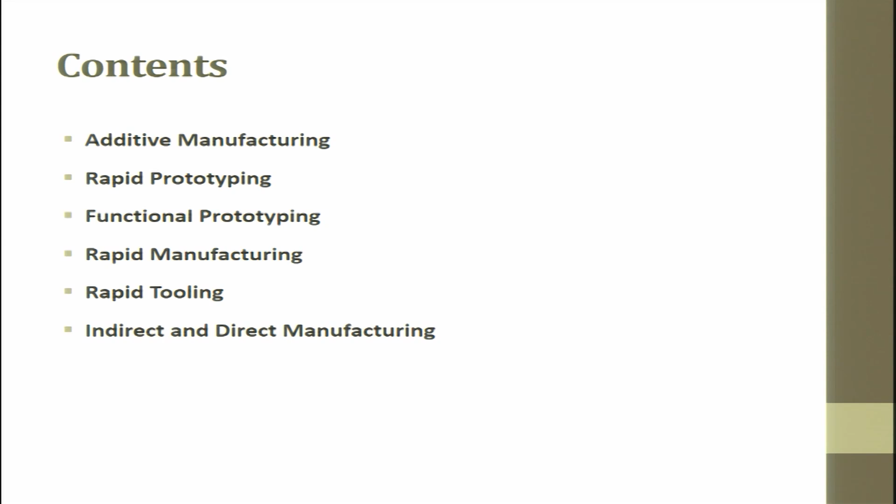Okay, so in this lecture 1, we will try to see additive manufacturing, we will see rapid prototyping, then we will see functional prototyping, then we will see rapid manufacturing, then rapid tooling, and finally direct and indirect manufacturing.

When we talk about rapid manufacturing, the industrial 3D printer is at the tipping point about to go mainstream in a big way. Earlier, additive manufacturing was thought of only from the prototyping point of view. Today, the power source and raw materials we use are moving towards real time requirements, which was earlier thought about in plastic, now changed into metal. Earlier we used to make only polymer based prototyping, today we are making metal based prototyping. The moment we make a prototype, we are now pushing it a bit more to a live requirement itself. So that is why industrial 3D printing is at the tipping point about to go mainstream in a big way.

Most executives and many engineers do not realize it, but this technology has moved well beyond prototyping, rapid tooling and toys. Rapid manufacturing is creating durable and safe products for sale to real customers in moderate to large quantities. This is where the terminology mass customization I talked about is getting integrated. This moderate can be 1, 2, 10, 200, 500, whatever it is, in moderate to large quantities.

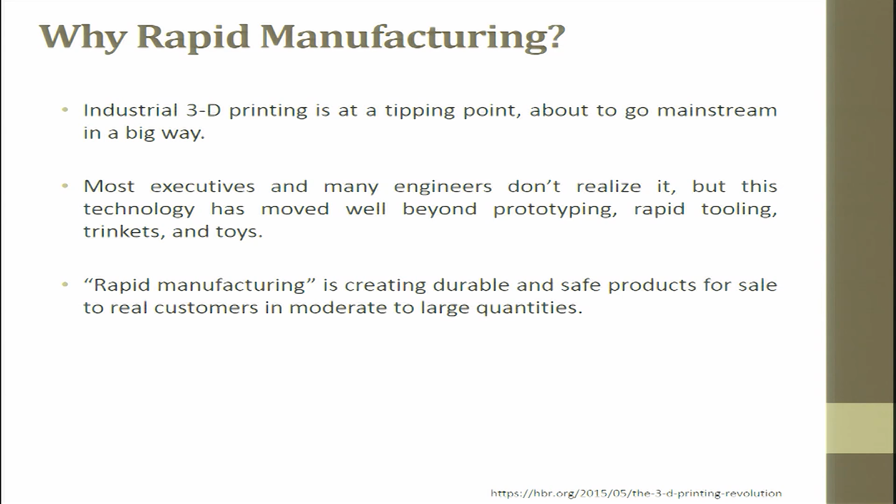Today, the major challenge is shrinking product manufacturing time. Earlier, we used to talk about, okay, if a big giant company decides to make a car, they say we will come out with a new car in the next 5 years, or the next 10 years. But today it has come down to next 6 months we will come out with a new car. So what has happened? The product life cycle time has shrunk down. The manufacturing time has shrunk down drastically.

The assembly line processes revolutionized production and dropped the assembly time for a single vehicle from 12 hours to just a few minutes. Today we talk about product delivery in minutes. We talk about pizza getting delivered at our residence in 30 minutes. So look at the amount of readiness which this product has in the stores. Here the product is all in a semi cooked state or a very raw state. Then it is all getting assembled, passed through an assembly line, which in terms of pizza is a furnace. So it is passed through the oven, and then after 10 minutes or 20 minutes or 3 minutes you get a pizza, right.

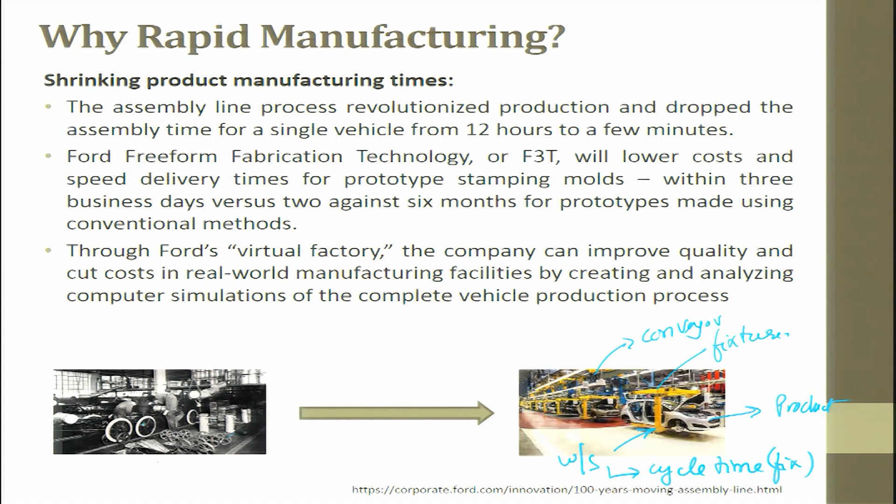So the product moves, and since it is an assembly line and continuously moving, the assembly happening at the workstation, the cycle time is also fixed. The product is produced, the conveyor belt is moving, and this is a fixture to hold it. Earlier the vehicle was moving where man was involved, and the cycle time was large, but now it has shrunk down drastically.

A US hearing aid company converted to 100% 3D printing in less than 500 days. So today hearing aids are made by rapid manufacturing. Today many products made for human-centric or human-friendly use are all done digitally. For example, they are first scanned for the requirement, converted into digital form, and the product is made such that it can get adhered and fixed in the required space.

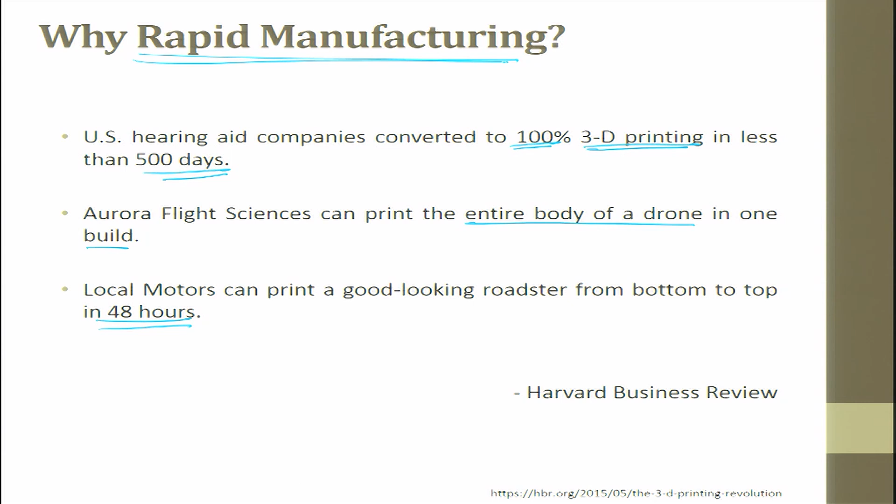Aurora Flight Sciences can print the entire body of your drone in one build. Today people have also realized that if you want to make a 3D product, it is good to start by making a 2D one, which can very quickly be cut through laser or any engraving tool. You cut it, then break the 2D pieces and assemble them to get the 3D part. So Aurora Flight Sciences can print the entire body of a drone in one build, and Local Motors can print a good looking roadster from bottom to top in 48 hours. These are some of the products made under rapid manufacturing.

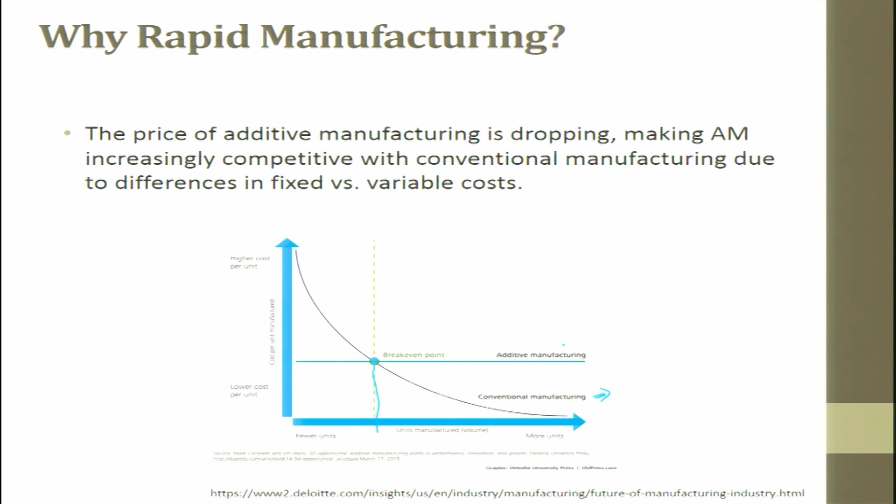This shows higher cost, lower cost, the cost per unit of manufacturing, and here it shows unit manufacturing in terms of volume. Of course, when more volumes are there, conventional is the best method of making it, especially sheet metal or metal forming operations - nothing can be more economical than that. But if the quantities are little, you can't use the same metal forming techniques, because the die cost is pretty expensive. So this is the breakeven point which talks about additive manufacturing versus conventional cost in terms of units.

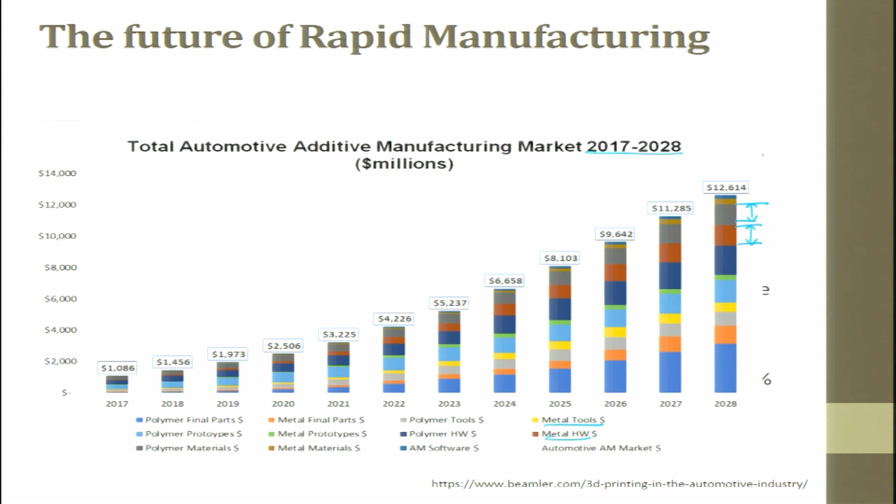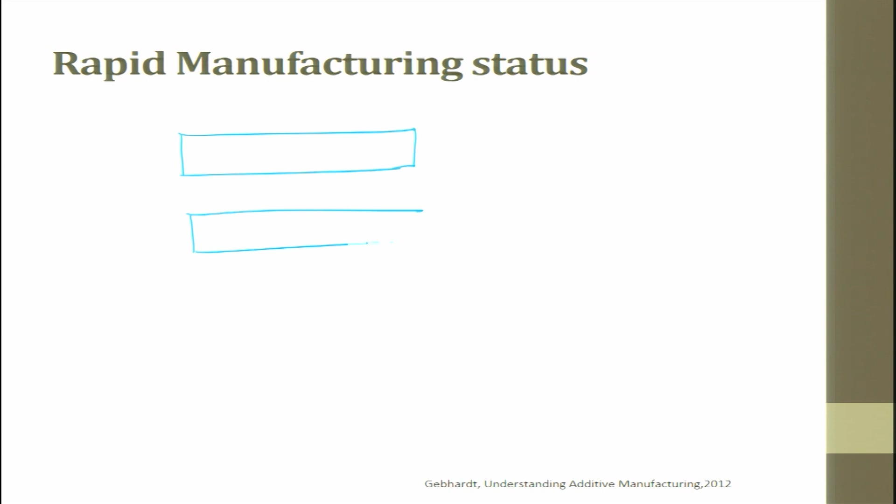Let us see the rapid manufacturing status. I would like to draw block diagrams. This is additive manufacturing, this is rapid prototyping, and this is rapid manufacturing. This in turn leads to solid imaging and concept modeling, and the next one is functional prototype - we will see what functional prototype is a little later. I am just giving you an overview of how it goes about. We have prototyping tools, then we have direct tools, and we have direct manufacturing.

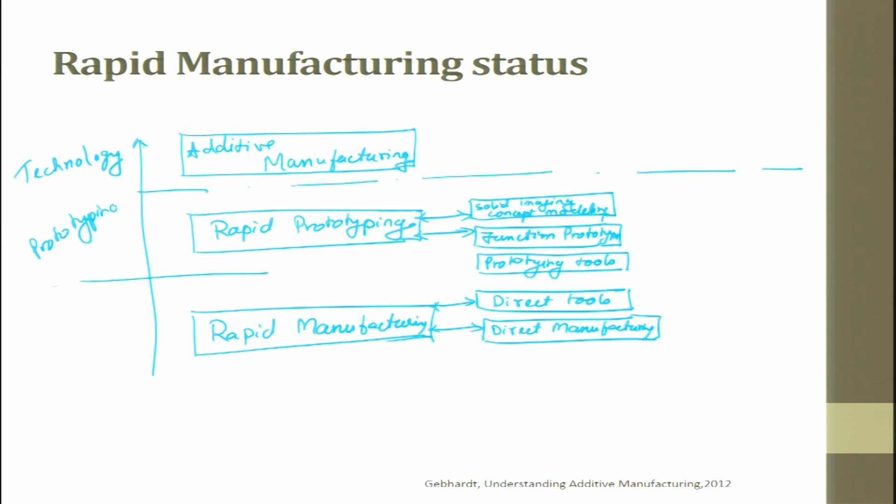I will divide it into segments. This is called technology, this is called prototyping, and this is called manufacturing. I will again divide this so it becomes easy for understanding. So this portion is additive manufacturing, additive processes, and here we have non-additive processes. From here I would like to go for indirect prototyping, and then we have indirect tooling, and then we have indirect manufacturing.

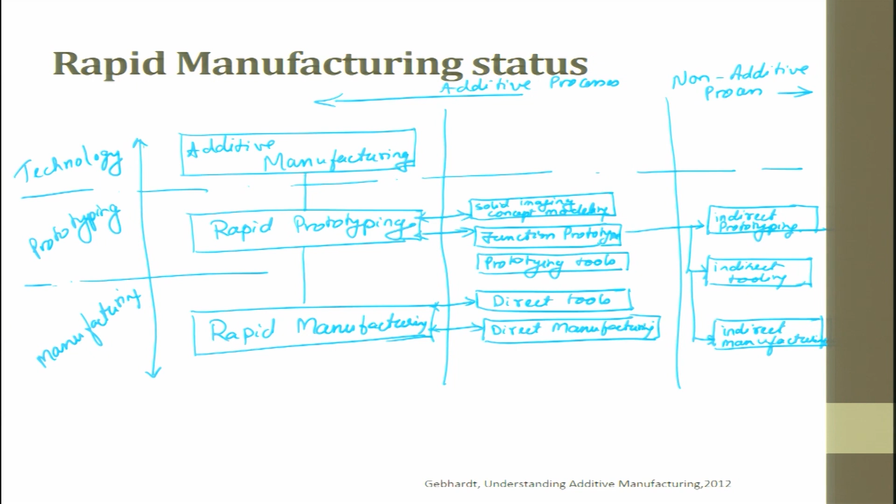Okay, this is the current rapid manufacturing status. If you look at it, this is where technology, prototyping and manufacturing fit in. We have additive manufacturing, then rapid prototyping, then rapid manufacturing. These are the arrows. So we will try to see what rapid manufacturing is as the course goes by.

The major modules we are going to cover include introduction to rapid manufacturing, then product engineering, a little bit about CAD, computer aided design, CAE, computer aided engineering, then CAM, computer aided manufacturing, and computer integrated manufacturing.

CAD is only the drawing, a drawing with simulation and optimization. When it gets transferred for manufacturing it is called CAM, and CAM with office automation in an industry is called computer integrated manufacturing. Then we will try to see design for modularity.

This modular design makes manufacturing today more comfortable and easy for rapid manufacturing. We will talk about reverse engineering, rapid manufacturing processes and technology, then rapid manufacturing digital factories. We will also talk finally about competitiveness in rapid manufacturing.

This course is reinforced with lab demonstration, self completion tasks, reading material and weekly quiz. Many of the quizzes will be for your understanding and some can be for submission. I will also give you exercises from live examples which you can think of and start solving. You don't have to submit it for correction or evaluation, it's only for your understanding.

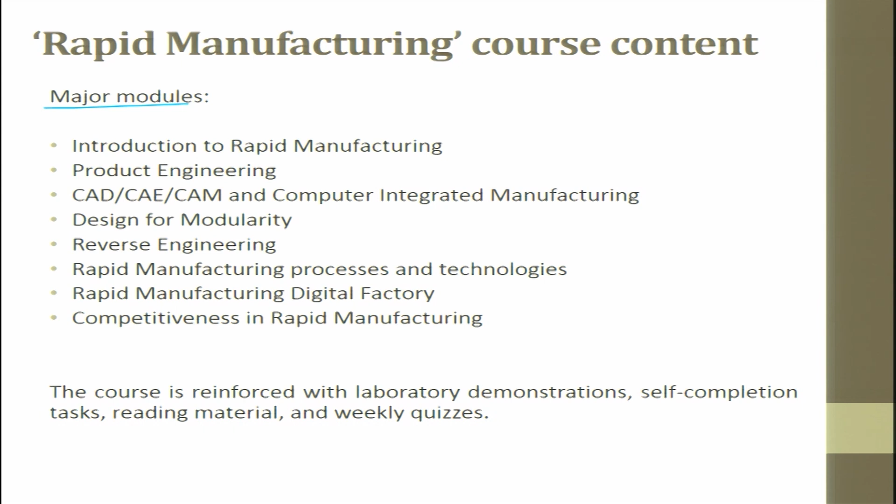Upon completion of this course, you will be able to participate in discussions with your peers, cater to interview questions, and take an examination on rapid manufacturing. Identifying the tangible and intangible elements of rapid manufacturing will also be an outcome. You will be able to select a process, tool and material for your product, and define broadly the levels of rapid manufacturing systems, from techniques and production lines to digital facilities for the entire enterprise. All these are expected outcomes of this course.

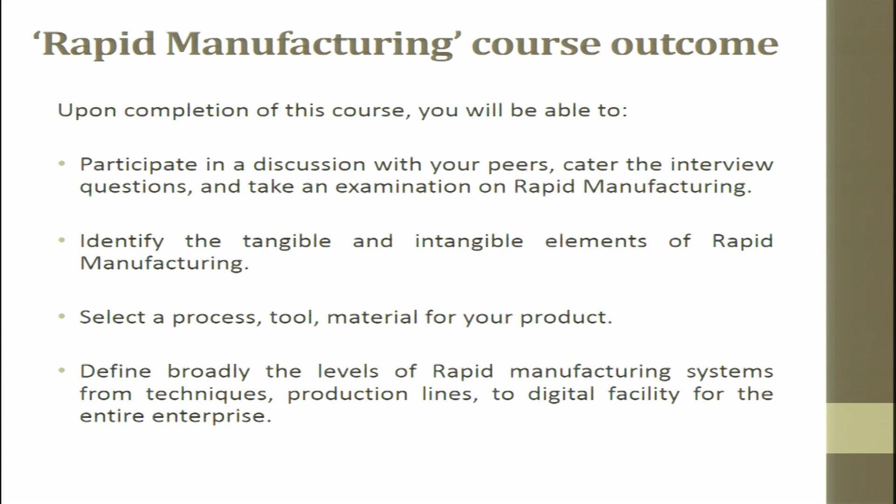The first one is additive manufacturing. So we will start with additive manufacturing, which is otherwise called layered manufacturing. Additive manufacturing is a layer-based automated fabrication process for making scaled three-dimensional physical objects directly from 3D CAD data without using part-depending tools.

This is very, very important. In rapid manufacturing, I build three-dimensional objects from fundamentally two-dimensional layers. I make layer by layer by layer, stitch those layers together, and make it into a 3D physical object. This object is made without involving any tools.

It was originally called 3D printing and is still frequently called that. Together with the well established subtractive manufacturing such as milling or turning, and the formative manufacturing such as casting and forging, additive manufacturing provides the third supporting pillar of the entire manufacturing technology.

So what we are trying to say is, here is a product, and here are three pillars: one is the subtractive pillar, the other is the constant volume pillar, and this is the additive pillar. For constant volume you have metal forming and casting. Here you have joining and additive manufacturing. For subtractive you have conventional and non-conventional machining processes.

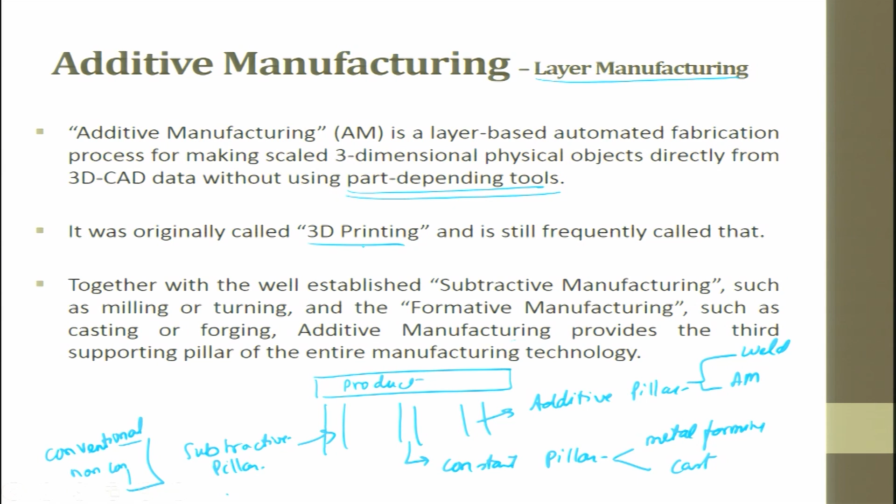So 3D printing is something which is very much talked about today. When the first approaches to additive manufacturing entered the market in 1987, it was very new. It was called rapid prototyping, or generative manufacturing. Generative manufacturing, rapid prototyping, layered prototyping, freeform manufacturing - all these words and terminologies are used interchangeably.

Later you will realize that 3D printing is a word which is different from what we are talking about in rapid prototyping. Both terms are still in use, and in past years many different names have been presented, and frequently more are added. Layered manufacturing is a very standard terminology used, which falls under additive manufacturing.

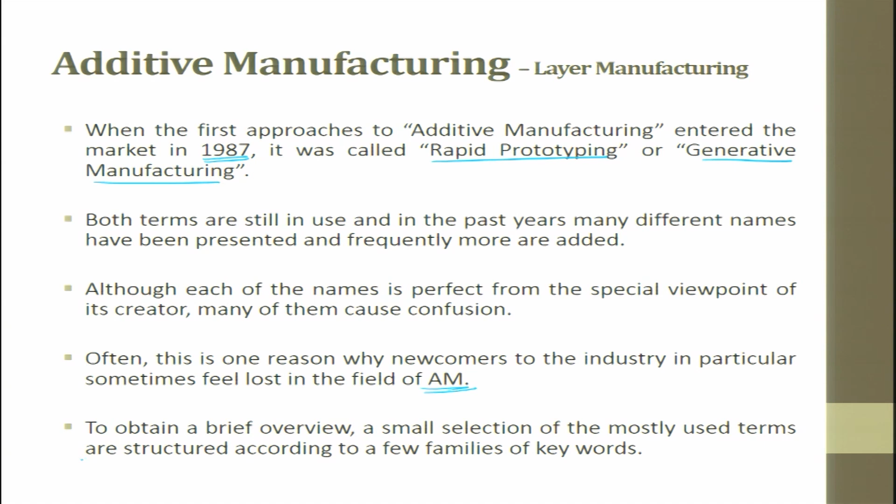Although each of the names is perfect from the special viewpoint of its creator, many of these cause confusion. Often this is one reason why newcomers to the industry in particular sometimes feel lost in the field of additive manufacturing. To obtain a brief overview, a small selection of the mostly used terms are structured according to a few families of keywords. Often used terms include rapid manufacturing, rapid technology, rapid prototyping, rapid tooling.

Additive manufacturing, additive layer manufacturing, additive digital manufacturing - these are the three terminologies which are used very exhaustively. This is also commonly used, and this is also commonly used.

Then at last, 3D - we use 3D printing and 3D modeling. So these are the terminologies which are often used: rapid manufacturing, rapid technology, rapid prototyping, rapid tooling.

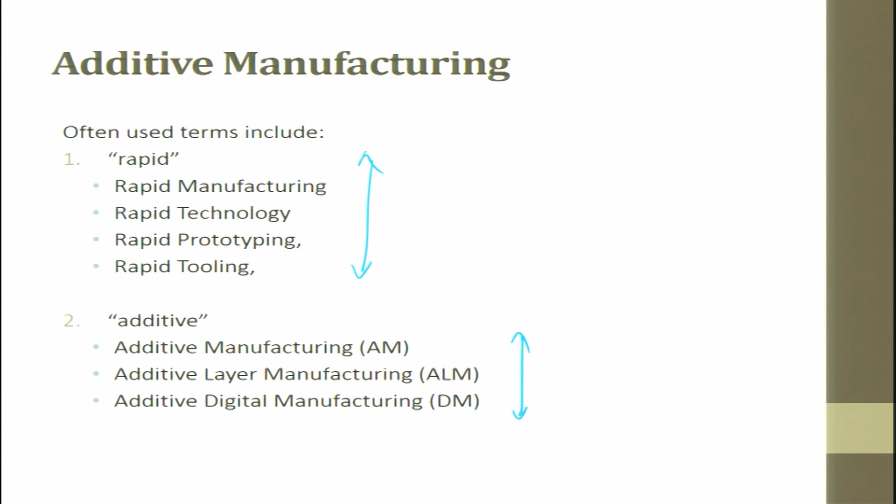When it comes to additive, it is additive manufacturing, additive layer manufacturing, additive digital manufacturing - it's almost the same. Layer based manufacturing, layer oriented manufacturing, layer manufacturing - it is almost the same.

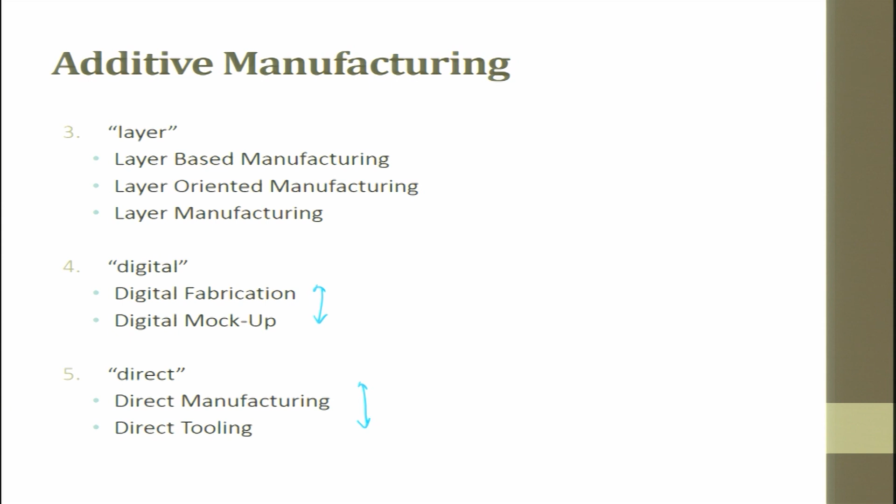Digital fabrication, digital mock-up - it's also used, they both are the same. And direct manufacturing, direct tooling - these are the terminologies which are used apart from 3D printing and 3D modeling.

As additive manufacturing is a comparably young technology compared to the other two pillars, there were almost no efforts for standardization for many years, other than some preliminary work done in Germany in the early 1990s.

The standardization of this has still not happened. Because of the non-standardization, these processes are not very much accepted in real time.

Now there is a lot of initiative which is going towards standardization of additive manufactured parts.

In 2007, a special recommendation dedicated to rapid prototyping, VDI 3404, was created under the supervision of the German Society for Mechanical Engineers.

In 2009, the American Society for Mechanical Engineers, in cooperation with the American Society for Testing and Materials, started the development of their own standards.

Like what we have, ISI, ISO, BSI, JIS - these are standards. So like that, people thought there is a need to initiate rapid prototyping standards too, because people did not realize in the initial days that this can be used for rapid manufacturing.

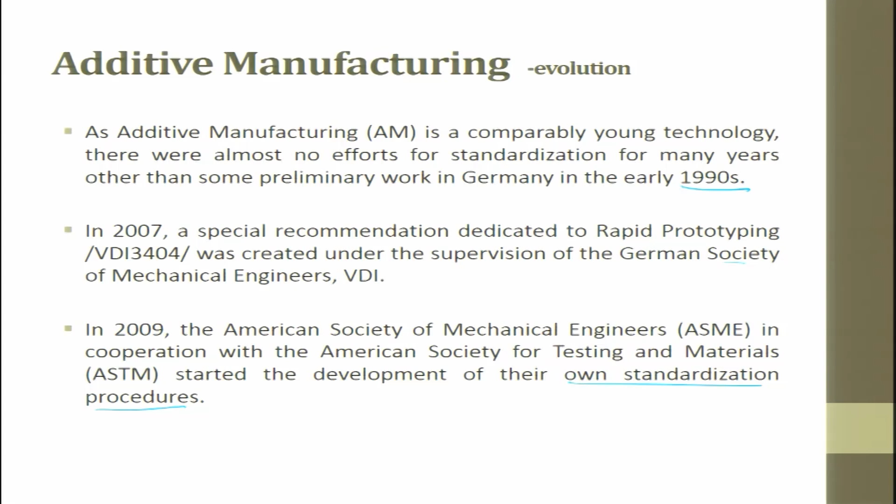They realized it only for prototyping, but now since there is a lot of need and requirements have arisen, standardization of rapid prototyping has also started.

In autumn 2009, the committee F42 on additive manufacturing issued F2792-09E1.

F2792, called the standard terminology for additive manufacturing technologies. They released a standard, and among other definitions, the name additive manufacturing was defined by this committee.

As it always takes time until newly defined terms are generally accepted, a great variety of different terms, increased by brand names and company driven terms, are still in use, sometimes even in competition with each other.

For a simple example, we always say let us take a Xerox copy of a document. Xerox was the company which made this photocopying technology or the photocopying device.

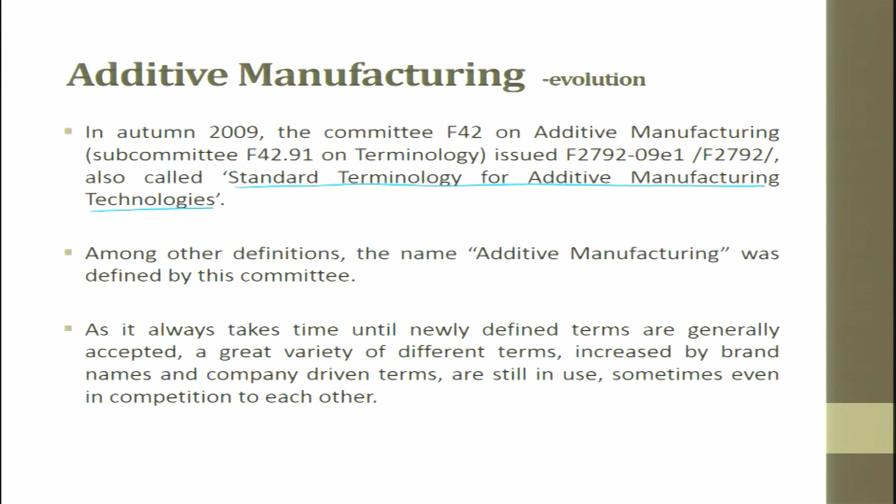The actual process is photocopying, but we go ahead calling the process in terms of the company name. That is what is still happening even now in rapid prototyping, rapid manufacturing, or additive manufacturing terminologies.

The principles of layered based technology: the term additive manufacturing, like generative manufacturing, covers any imaginable way of adding materials in order to create a three-dimensional physical part.

This is done from the data which is received or accepted from the virtual form.

The technical realization of additive manufacturing is based solely on layers, and therefore it is called layer based technology, layer oriented technology, or even layered technology.

Consequently, today the terms additive manufacturing, generative manufacturing, and layered based technologies are sometimes used synonymously.

In the future, as new additive technologies may become available, they will need to be classified within the current structure of rapid manufacturing definitions.

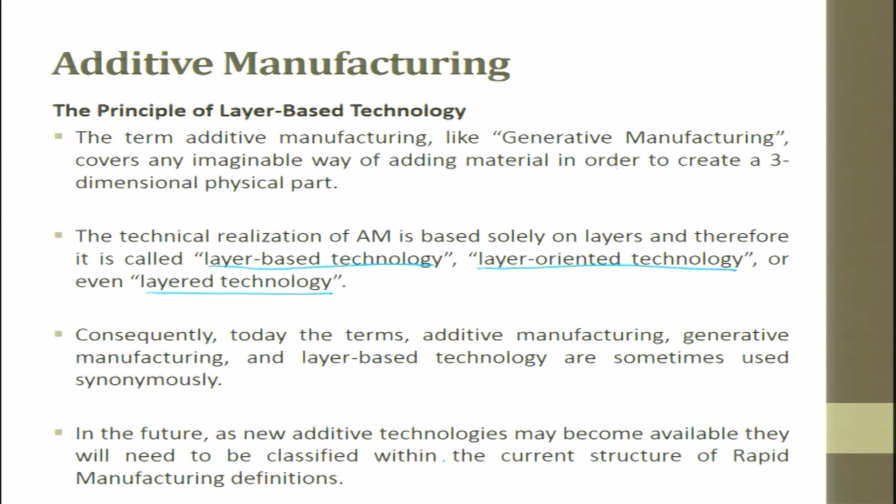As an example, the process called ballistic particle manufacturing (BPM) was introduced already in the early 1990s, but vanished soon after.

It added material from all spatial directions by jetting discrete volumes onto the emerging object. This technology was additive but not layer based - understand the difference, this was particle by particle impinged.

The principle of layer based technology is to compose a three-dimensional physical object, called the part, from many layers of mostly equal thickness. Today we also talk about variable thickness, but primarily the machine is expected to do a standard thickness only.

Each layer is contoured according to the corresponding three-dimensional data set and put on top of the preceding one.

That means to say, I place one layer, I place the next layer, I place the third layer, I go on to the fourth layer. So I place layer by layer.

This is the layer we are talking about, this is the thickness we are talking about, and this is placed on top of the other - this is placed, this is placed, this is placed.

So each layer is contoured according. This is only the side view. Suppose if I wanted to look at the plan view, you can have something like this. So each layer is contoured according to the corresponding three-dimensional data set and put on top of the preceding one.

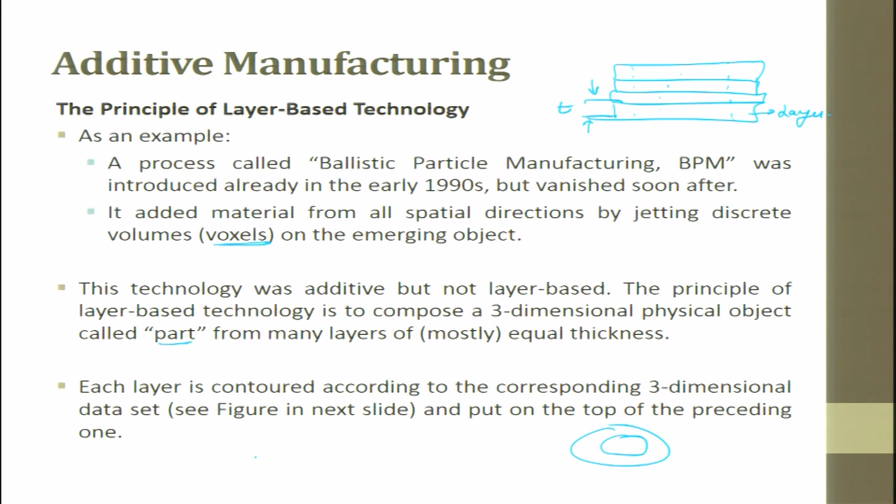So, this is how the layer looks like. Here the principles of layer based technology is explained. You can see a plywood, a thin wood sheet, carved layer by layer and fixed one upon each other to get a final product like this. The principle of layer based technology: contoured layers, three-dimensional made from stacking these layers one upon each other, we get the three-dimensional part, layer to part, 2D layer.

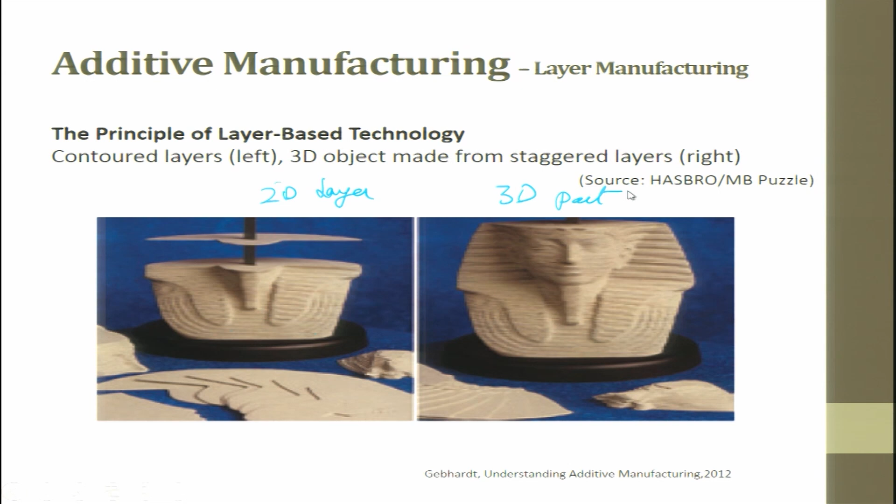So, additive manufacturing follows the schematic given here. After an automated process of mesh fixing, slicing and hatching, the desired structure is transferred into the material volume, by scanning the laser focus point in a layer by layer process. Here I have taken one particular material called photopolymer, but you can take any material. We are trying to develop it.

The 3D printing workflow is based on multiple photon absorption. Polymerization is only triggered in the high intensity region within the focal volume. So what we are trying to say is, we are trying to develop a polymer part. This polymer part is developed from a polymer layer. The layer, whatever is getting made, the starting material is a liquid.

So now what I do is, I have a laser which comes down, and I have a tank in which photopolymer is filled. This laser tries to hit at a spot, and this spot alone, because of the absorption phenomena, absorbs the UV light and gets cured. If I move it, several dots can be created, and if I make it into a hatch pattern, then it forms a complete layer.

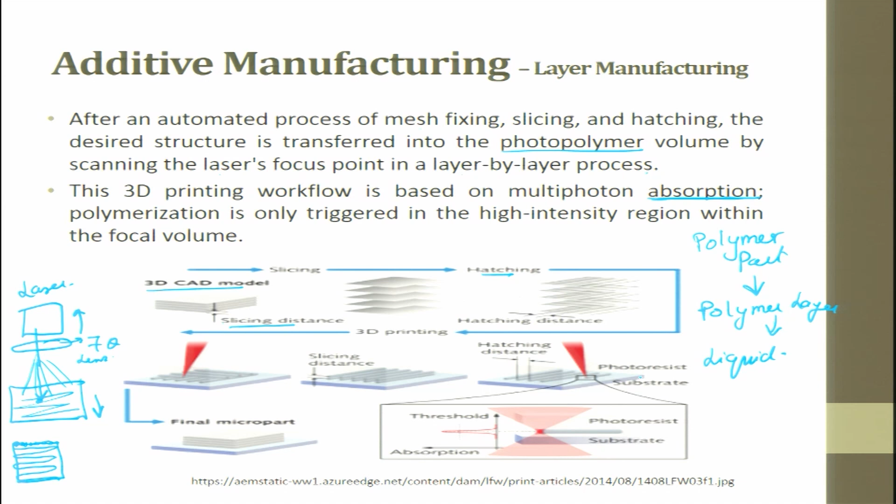So when you give CAD data, this CAD data is first sliced, and it is hatched. So we are doing the reverse of it: polymer part, polymer layer, then into liquid. So first, slicing is done, then the slicing is broken into hatching. This is what is called hatching. There are several patterns of doing hatching, and we can optimize the hatching pattern with respect to time, with respect to strength, whatever you want.

Polymerization is only triggered in the high intensity region within the focal volume. So what is the focal volume? This is what it is. You can see here the slice - this is the slice distance, and inside a slice we have hatch patterns. Between the hatches it is called the hatching distance.

And then what happens? You try to make a single layer. So this is the slice distance, hatch distance, you keep doing it. And when the laser tries to hit the surface, I try to play with changing the focal plane. The moment I change the focal plane, the curing can happen at the surface, in between the surface, below the surface, at whatever z direction I want. That means I can keep adding layer by layer within the polymer tank itself.

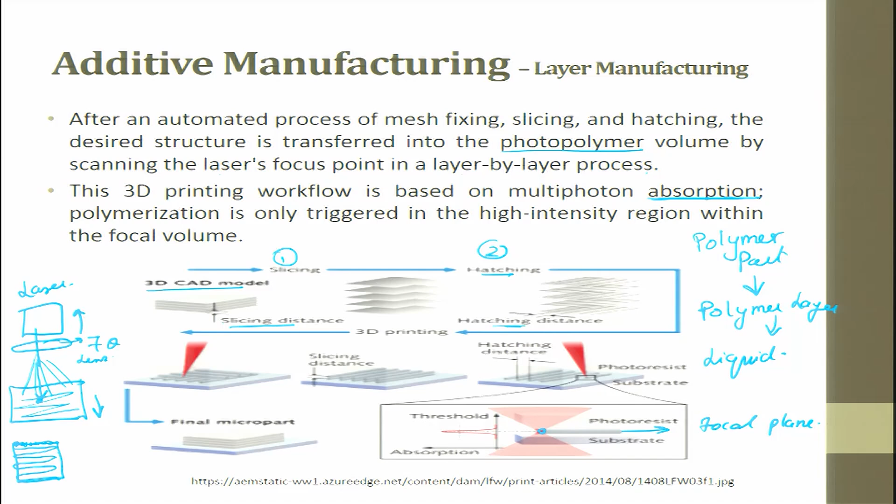So this is absorption threshold, and here is what photopolymerization happening looks like. This process is typically for a photopolymer which is used as a liquid, wherein we use UV laser to cure the photopolymer first in dot form, then in line form, then in layer form, then stitching of layers, to get a 3-dimensional object. So this is what is explained in this figure.

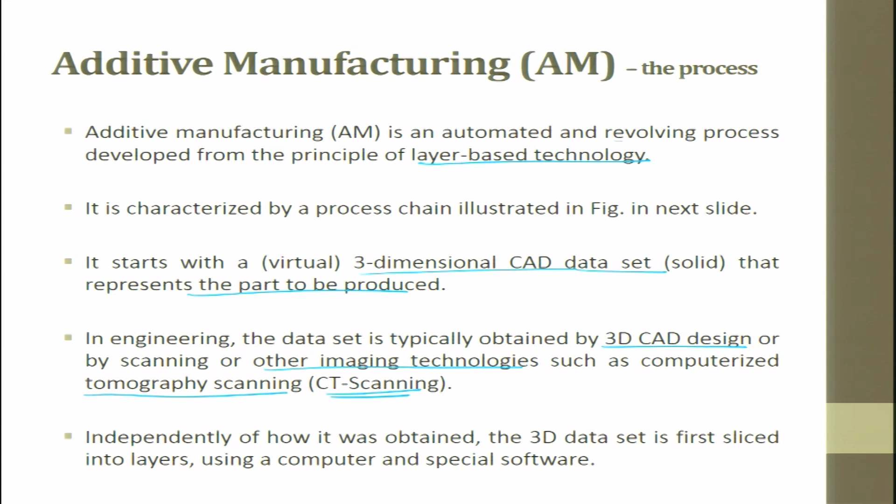So additive manufacturing is an automated and revolving process developed from the principle of layer based technology. It is characterized by a process chain illustrated in the figure, which is explained in the next slide. It starts from a 3D CAD data set that represents the part to be produced. In engineering, this data set is typically obtained by 3D CAD design, or by scanning or other imaging technologies such as computerized tomographic scanning. CT scanning is also used for developing the data. Independent of how it is obtained, a 3D data set is first sliced into layers using a computer and special software. Thank you very much.